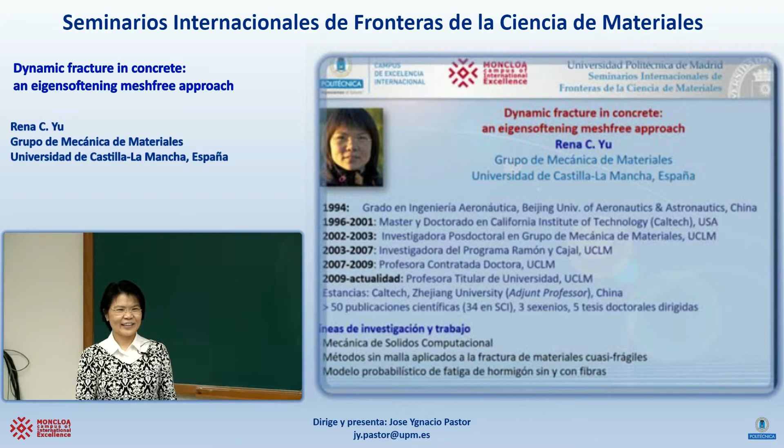Okay, so the title is Modeling the Dynamic Fracture in Concrete, an Eigensoftening Meshfree Approach. This work is in collaboration with Pedro Navas, a graduate student who just defended his thesis 10 days ago, with Professor Gonzalo Ruiz, and also Bo Li, who's from Case Western Reserve University.

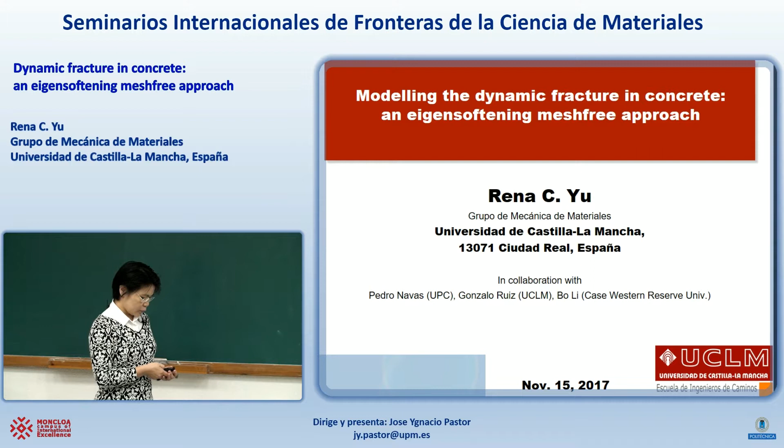Since I'm going to be talking about concrete, I want to show that concrete is a material both ancient and modern. The first picture I'm showing here is the Roman Pantheon, built in 128 AD. It is still the largest unreinforced concrete dome in the world. I guess most of you, if you have gone to Rome, might have seen this dome. And the natural light comes in from the top part.

The second one is the Los Angeles Cathedral. I was in Los Angeles for 5 years, but this was finished in 2002, 1 year after. The Cathedral of Our Lady of the Angels, actually. This was designed by a Spanish architect, Rafael Moneo, and it is made of architectural concrete. If you go to Los Angeles, go inside; it's marvelous work, very spacious, with a very modern design.

The third one I took from the webpage of the company Acciona, which is building wind towers, called Acciona Wind, I think. Now, in order to generate more electricity, the towers are required to be higher and higher. In this case, traditional steel towers have a problem of resonance because the working frequency is rather low, while concrete offers a cost-effective alternative to steel for high-rise wind towers.

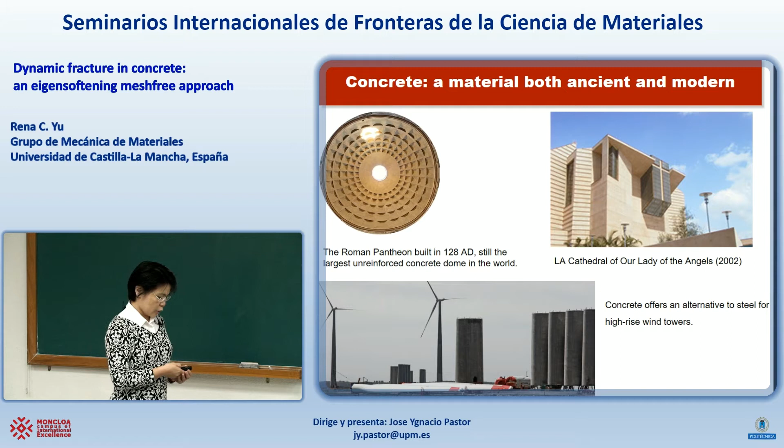Especially in this case, as engineers, we are interested to know what the dynamic behavior of concrete is. So I would like to show what we do with concrete in our group at the University of Castilla-La Mancha. This is our lab. We can do both structure and material tests, basically the mechanical characterization of concrete, like the tensile strength, compressive strength, and fracture energy.

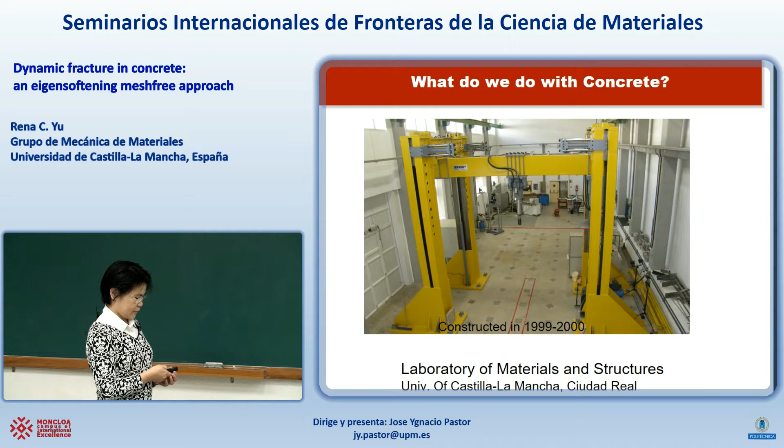And this lab was built at the end of the last century, so it is quite new. And I would emphasize that below this strong floor, we have our self-designed drop weight machine. This is the one that we use to do dynamic tests.

And this drop weight machine can drop a weight from the top, about 2.5 meters, and can drop a weight up to 120 kilograms. So I'm showing here a video of us breaking one concrete beam. That's how it works. So this is our high strength concrete being broken after the impact.

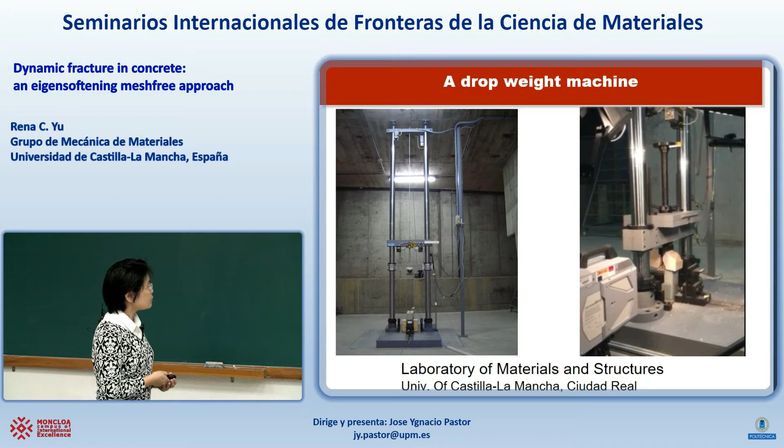So I myself in the group am in charge of the numerical part. So I'm going to show here some previous work that we used to model fracture through cohesive elements in a finite element framework. So these simulations are trying to show how the fracture propagates in a concrete beam that is being reinforced with both transversal rebars and longitudinal rebars.

This series of experimental tests was published, which is the work of Carmona, Ruiz, and Del Viso, who are both graduate students of the group. And the first row of the three pictures I'm showing is a beam that is without any notch. So these colors show to what extent the fracture has been extended. So you see how the fracture becomes localized at the central part of the beam without the notch.

While this row corresponds to a beam that has both transversal and longitudinal rebars. Again, these are numerical trials that are carried out. Without the notches, you see when we have a longitudinal rebar, there are more spread or distributed micro cracks before it finally localizes.

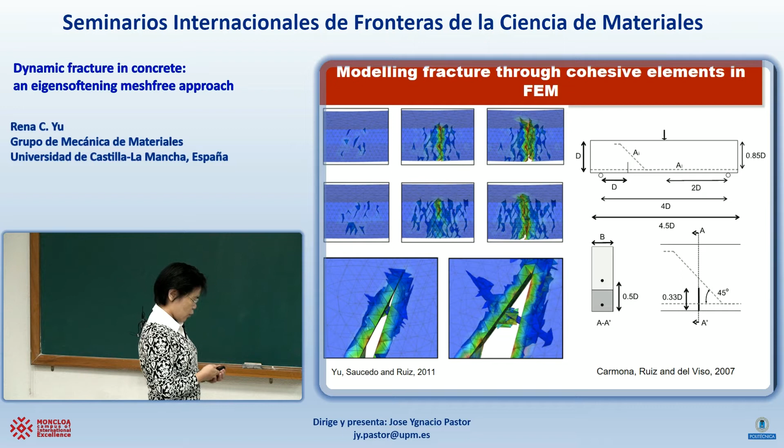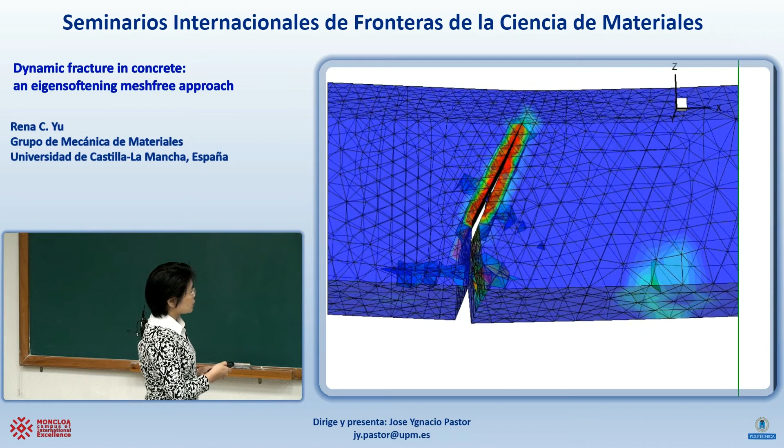So the following is a video to see how this crack propagates. You see this is the longitudinal rebar, and this is the crack that propagates along the element boundaries, and this is a transversal rebar. The red color corresponds to a crack that has become a stress-free crack.

I have to say this is a nice video, but see here, it goes along the element boundaries, but here, since the predicted crack does not exactly align with the element boundaries, it becomes zigzag. Okay? And this simulation was actually a static test, but we had to implement a quite complicated static dynamic algorithm to predict this part, which is a dynamic fracture within a static loading.

And this video, by that time, 6-7 years ago, took 2 weeks to run. I have to say I didn't use an ordinary PC. It was a quite high performance workstation to run these calculations. Of course, this is 3D.

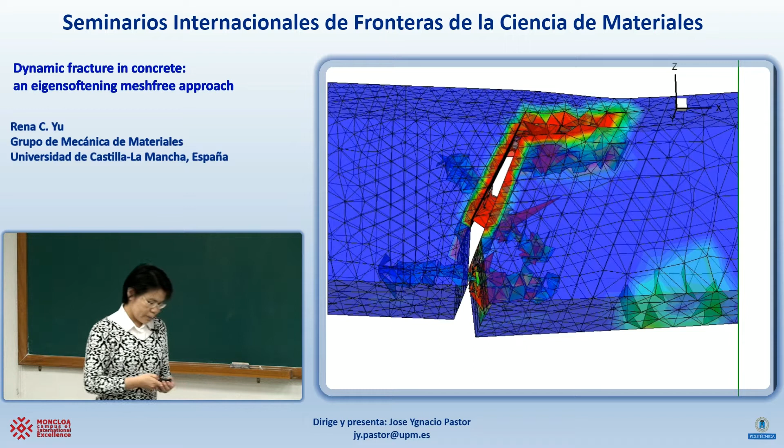And for the numerical part, since we need to do many parametric studies, this is not admissible, so we try to look for some alternatives. One of the methods was, of course, the mesh-free method, so that the crack is not aligned along the element boundaries.

So the rest of the talk follows this outline. I'm going to first speak about the mesh-free methods and the corresponding shape functions that we're going to use. Then the eigen-erosion approach to brittle fracture, and the third one is the eigen-softening approach, which we developed for quasi-brittle fracture, for materials like concrete. Then I will speak about the numerical simulations on the dynamic fracture of concrete, and later on some conclusions and future work.

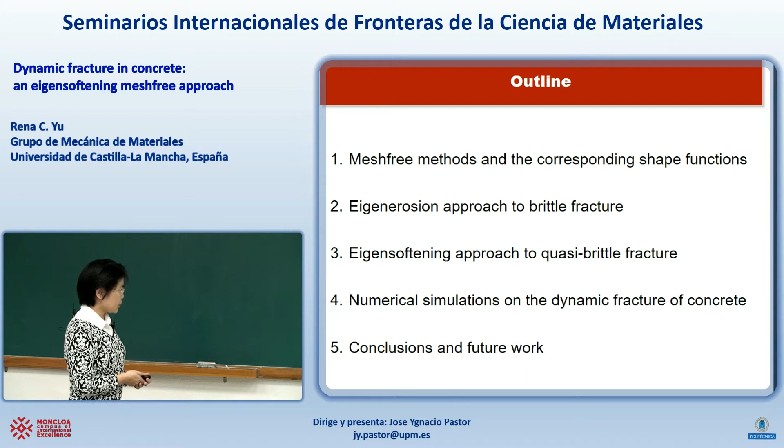So, some basics on the mesh-free methodology. Here what I show is a cut from a finite element mesh. These red solid circles are actually the integration points. For example, if this is a triangle element, of course in 2D, these blue circles are the nodal points, and these are the integration points.

So if we use a mesh-free approach, what we do is take out the elements. But we still have these integration points and the nodal points, and how they relate with each other is through a circle of influence defined by a radius. Okay?

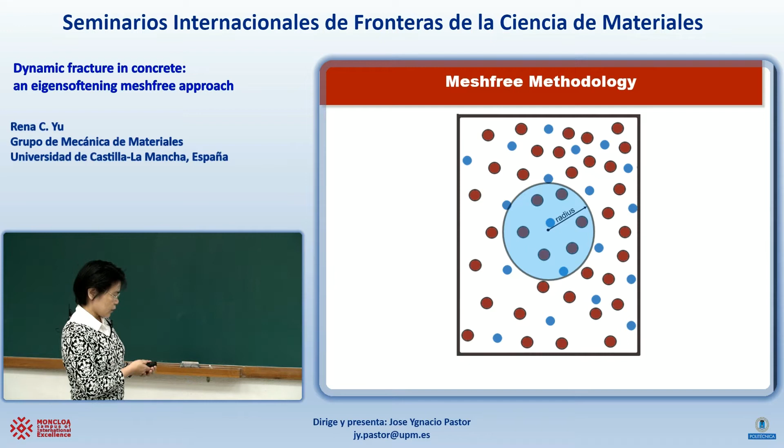In the mesh-free method that I'm going to speak about, we're going to use the same integration points also as material points. So this facilitates that we always have mass conservation. There are many other flavors of mesh-free methods, but I'm going to talk about the one that we have implemented.

So the one thing to speak about is the shape functions, because all the numerical discretization is based on the shape functions. These are the two types of shape functions. One is the polynomial type. This is a Lagrange polynomial function based on many nodal points, because if we want to reach a higher order of accuracy, we want to use more nodes of interpolation.

And the disadvantage of the polynomial type is that if we look at those two shaded squares, this part is negative. So if we want to interpolate some function, we do not like this negative part. This is not physical when we try to do some interpolations.

While on the right side, what you see is one type of exponential function. Those are the nodal points. You see this is a 3D plot. If you look at it in 2D, the nice part is that we have this bell shape. These points may approach 0, but they don't go to the negative regime.

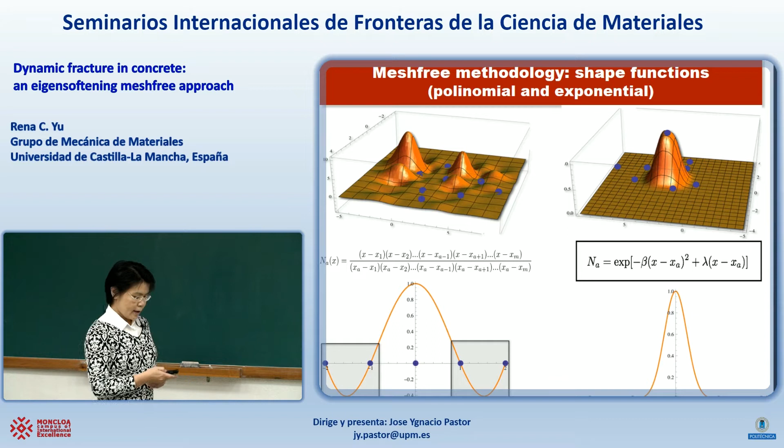And from the many types of exponential functions, I'm going to speak about one type, which is the shape functions based on the principle of maximum entropy. The principle of maximum entropy comes from information theory, which is about unbiased statistical inference based on the nodal data. According to Jaynes, this principle says the least biased probability distribution is that which maximizes entropy subject to all known constraints.

So what is the role of the probability distribution here when we talk about shape functions? Here p_A is a probability function at a node A. When we talk about a probability distribution, it is positive. This is one property that we like for the shape functions. Another is that the sum is equal to 1, which is precisely the partition of unity property of the shape functions. And the third constraint ensures the function is able to interpolate a linear function exactly.

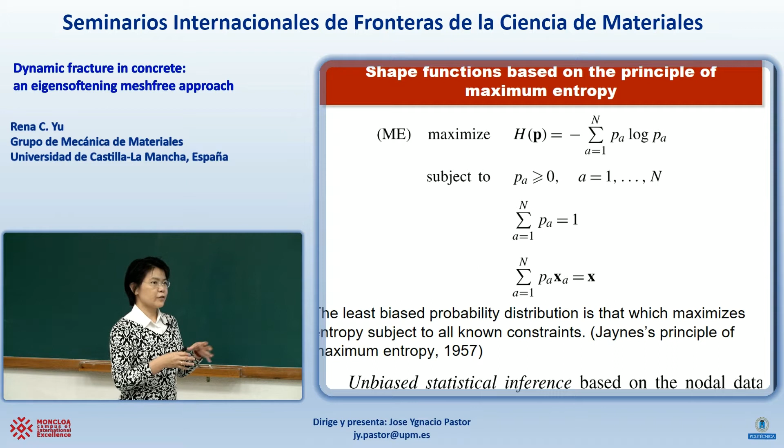So this function, the probability of node A times its logarithm, summed with the negative sign, is the entropy. If we maximize this function with respect to those three constraints, we have the least biased probability distribution. What does that mean? It means that if you want to do interpolation for a field variable, we would like to have the information of all the nodes without any bias. But on the other hand, we would also like our shape functions to have the least number of nodes possible, the least width for the shape function.

So this is the extension carried out by Arroyo and Ortiz in 2006. They modified this original entropy function with a parameter beta, with a function U of the position x and the probability p. And now we minimize this function. Remember, before it was maximized. Now we have this negative sign, and a minimization problem with respect to the same constraints. And this is the type of exponential functions that satisfy this minimization problem.

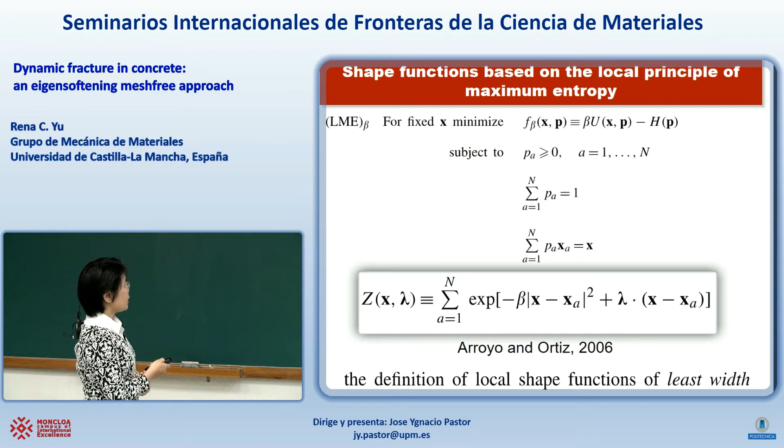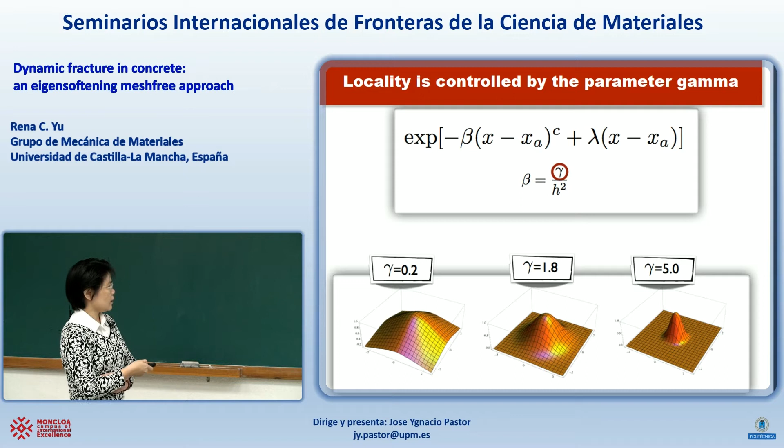And if we look specifically at this exponential function, how does it look with respect to the control parameter gamma? Before, we had the parameter beta; beta is defined as gamma divided by h squared, where h is the nodal spacing. If gamma equals 0.2, we have quite a spread function. If gamma is bigger, equal to 5, the function is quite localized, with a smaller width of the shape function. A number in between, gamma 1.8, gives a function like this. Normally in the calculation we use gamma between 1 and 2.

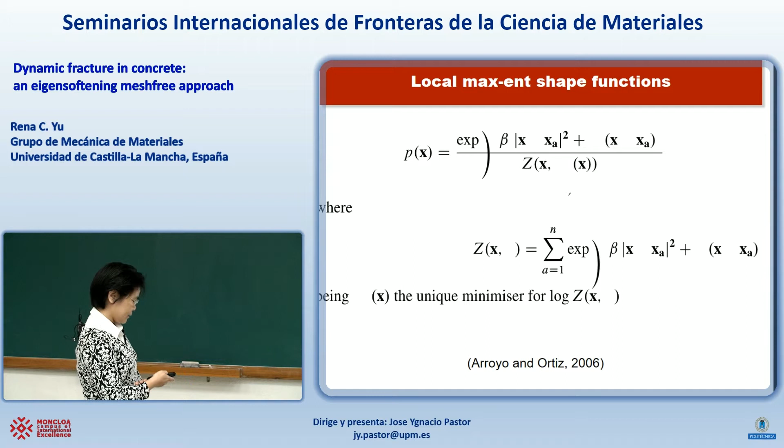...is the unique minimizer for the logarithmic function of lambda. This can be found in the work of Arroyo and Ortiz that I cited before. What I wanted to show here is that once we have the proper shape functions and the mesh-free spatial discretization for a domain like this, this is for integration time tk, this is for integration time tk plus 1, and this is a deformation mapping from tk to tk plus 1.

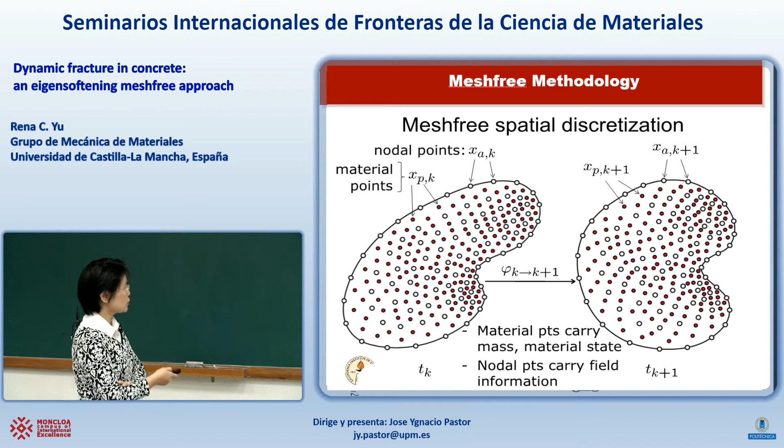The white empty circles correspond to the nodal points, which carry the field information like displacements, velocities, and accelerations, while the red solid circles are the material points, or what I previously called the integration points. They carry the state variables: not only mass but also stress, strain, and the internal variables. Okay. So once we have that, we would like to solve the problem of fracture.

So we start with the approach developed by Pandolfi and Ortiz in 2012, which is called the eigen-erosion approach to brittle fracture. The idea is that we have our 3D domain omega. This is the traction boundary condition. This is the crack set. And zooming in on the crack tip, we have the crack front represented by L, and during the time step delta t, or at time t plus delta t, the crack set has increased by this amount.

The energy functional in use is actually this. This is a strain energy function. There should be a minus sign here, and this is the traction, and this is the displacement: the external work. The idea is that this strain energy functional is added with an eigendeformation. The eigendeformation is a mode of deformation that does not cost local energy. It is defined as follows: delta here is the jump between the two crack surfaces, while n is the unit normal here. This delta c is the crack set.

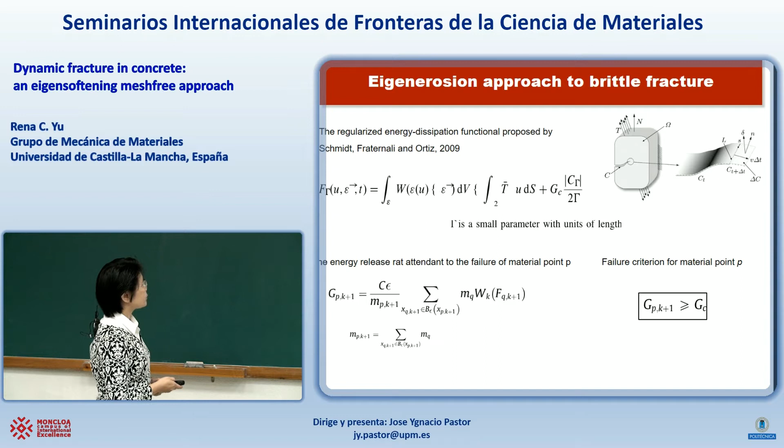The criterion for fracture is that if this energy release rate is greater than the specific fracture energy of the material, then a crack is formed. When the crack forms at a material point, the material point fails by the so-called erosion technique, so the material loses its entire stiffness. That's why the method was called eigenerosion.

This eigenerosion approach was designed for perfectly brittle materials, even though later on they used it, for example, for a metal, aluminum, to simulate the mixed tension torsion fracture experiments carried out in 1987. In the work of Pandolfi and Ortiz, they chose only the central part as the notch, did a triangulation of this part, and then took off the mesh. This is what is left with the initial material points, and these are the failed material points.

Of course, this is quite a heavy calculation, and this is the reconstructed failure surface. This is the projected profile. There are some empty areas. This is the mixed tension torsion approach.

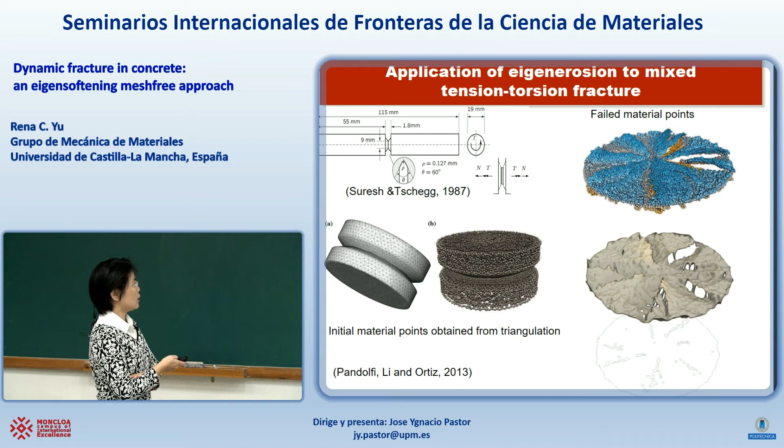Since we want to apply this approach to concrete, and we know that concrete is a quasi-brittle material, we do not expect that the eigenerosion approach would work, at least not perfectly. So we developed, with respect to the equation I have shown before, the energy release rate, we work on this equation. We try to get the incremental strain energy, because later we want to use a stress criterion instead of the energetic criterion.

So this multiplication of the terms gives us a principal stress. This is a principal stress for a material point Q, and this is an equivalent strain for this material point. And this equivalent critical stress, which is our principal stress, is defined as an average over a certain radius for all the material points Q added together, and this is the sum.

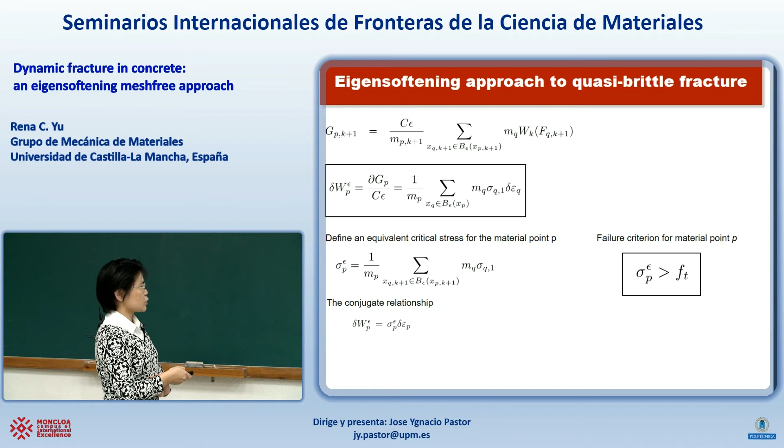Okay, this definition allows us to define the conjugate relationship so that we have a stress and a strain. This is the principal stress, and this is our equivalent strain. So since we have this stress defined, we are going to fail the material point P if it reaches or is greater than the tensile strength of the material.

So our idea was to be able to implement the cohesive fracture. What you see here is that in concrete, I'm not sure if everyone knows, when the cracks start to form, it opens gradually. So it does not go to zero right away. It gradually softens until our critical opening. Okay? This is the case for linear softening behavior, and the shaded area is the fracture energy.

So we define a damage variable, for example, corresponding to an opening Wn. This corresponds to a softened stress, which is Fn. We define a damage variable so that when we calculate the internal stress, this damage variable makes the material less stiff. So when this is equal to 0, we have our perfect material, the same as before. If it comes to this point, it will be 1, and then the material has lost all its resistance. Okay?

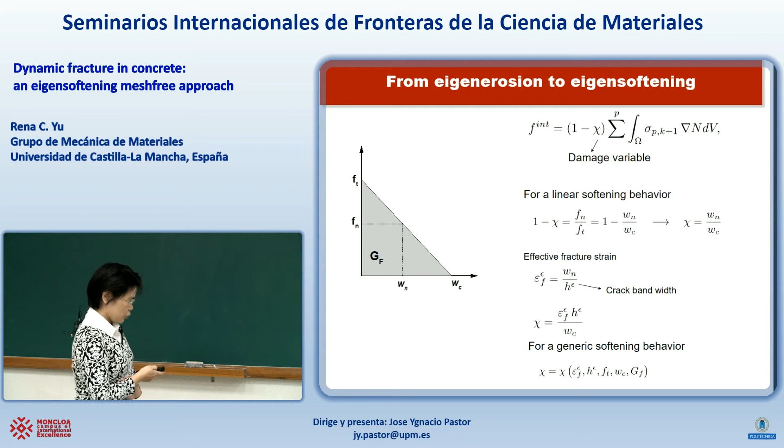Okay. So once we have established the mesh-free framework for fracture, remember we also defined the eigensoftening approach to fracture. We would like to model some dynamic fracture in high-strength concrete. Actually, this was one of the broken pieces of a beam. This is a beam where the span is 300 millimeters and the total length is 420 millimeters. It has a notch to half of its height. The height is 100, and the width is 100 millimeters.

And parallel to the center section, there were 4 strain gauges glued there to measure the strain history. Additionally, the reaction loads were measured at these 2 supports. What I show here is the loading line displacement and the reaction load measured from the 2 supports. These were the first 3 curves for the loading velocities 10 to the minus 4, 10 to the minus 1, and this is like 17.

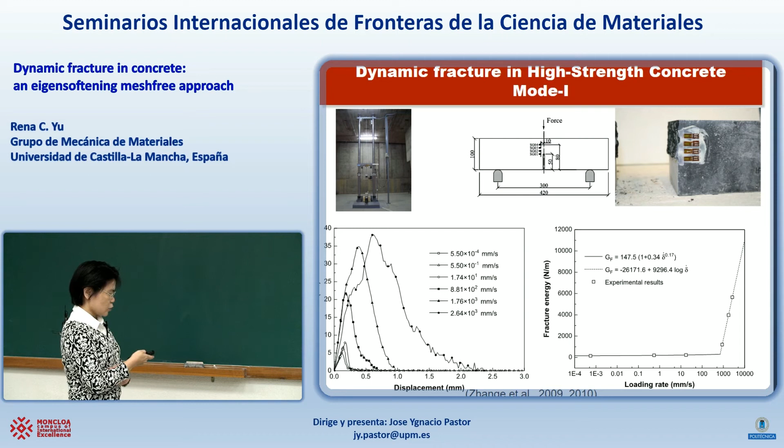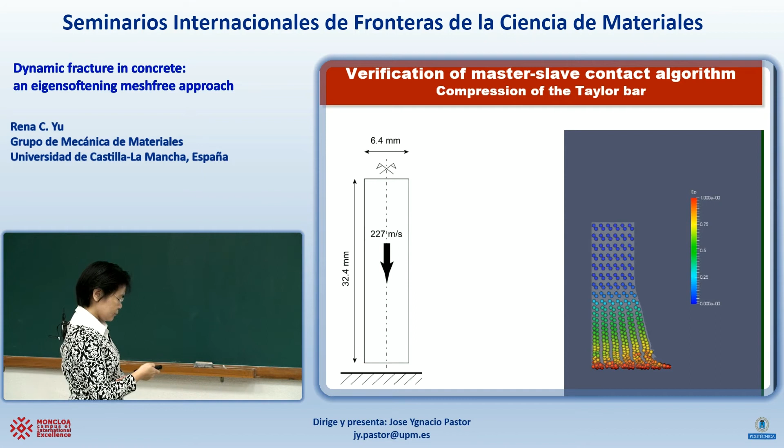And so we model the tests, using both the eigen erosion and also the eigen softening approach that we developed, and we would like to see how they compare with the experimental data. This is one of the cases because in the experimental test there were 3 velocities carried out, so we compare one of the cases.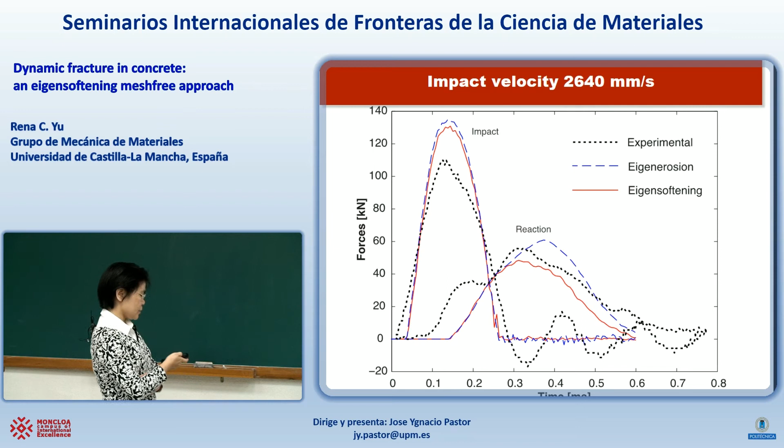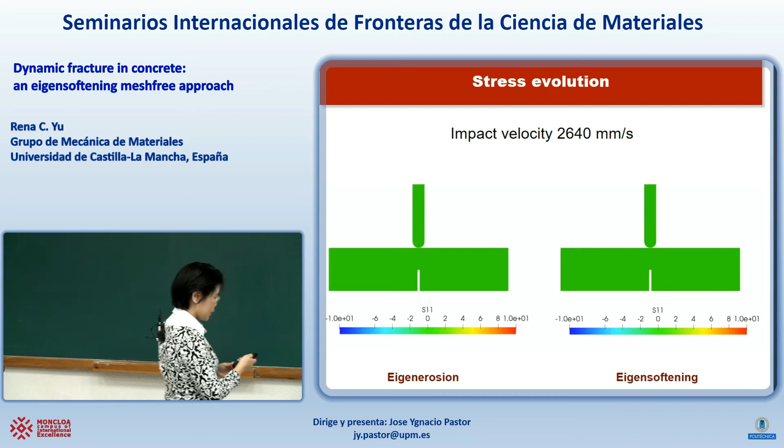And if we look at a video of how the stress evolution for the stress S11, the horizontal direction, let's see if it works. On the left side, you have the eigen erosion approach, on the right side is the eigen softening approach. What you see here is that we use a maximum of 10 megapascals, the minimum is minus 10 megapascals.

I'm going to show more that for the case if we use eigen erosion, we always have a bigger area of stress concentration. Actually, the maximum would reach around 50 to 60 megapascals. I forgot to say that the tensile strength of the material is 5 megapascals.

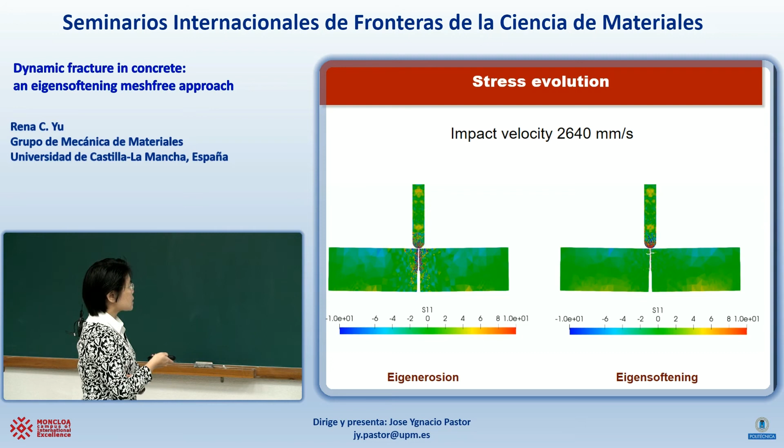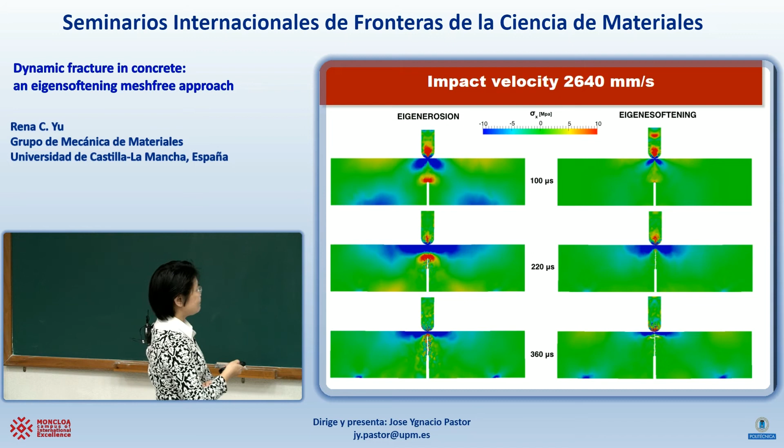The following velocity, we see something similar, but here we already see some small branches, and this is the one corresponding to the video — we have 2 branches here.

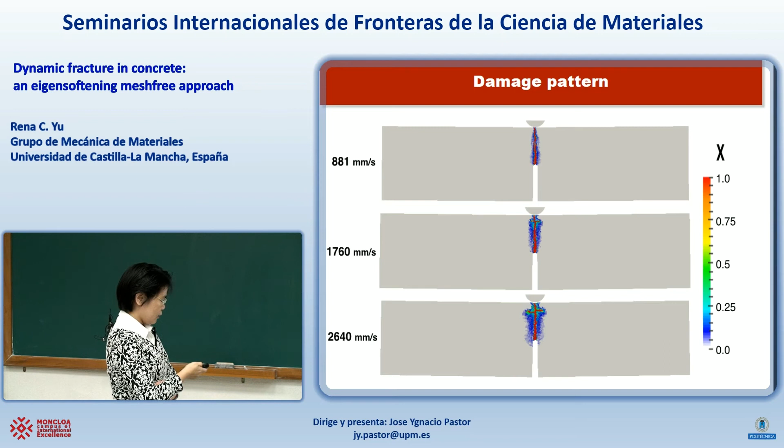And since this is a mode 1 crack, the crack pattern, we somehow know it's going to predict a straight crack. We would like to see for the 3 different velocities what the damage pattern looks like. So what you see here is that 1 means the material does not resist anything, and 0 means it's still perfect. When the velocity increases, you have a bigger area of damage, and additionally you have 2 cracks. This is something that was expected from the previous calculation — we also observed branches like this.

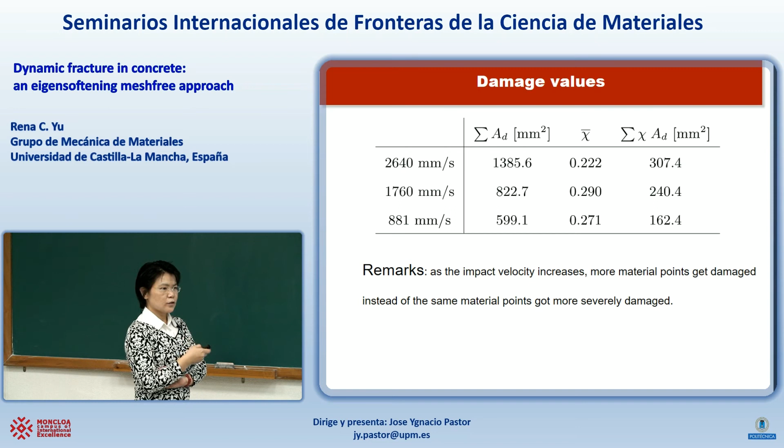And quantitatively, if we look at the area of damage for those 3 velocities, and multiply the corresponding material point's area and damage value, summing it up and dividing by the total area, this gives the average damage for each velocity. We see that those numbers are not really significantly different. As the impact velocity increases, more material gets damaged, but the same material doesn't get more severely damaged.

So if we want to look at the dynamic increase factor in strength — before we've seen that if we use eigen erosion, the stresses are being overestimated, while the eigen softening approach that we developed gives a more reasonable number, because remember, 5 megapascals is the static tensile strength. So the dynamic increase factor for those cases is between 1.1 and 2.2.

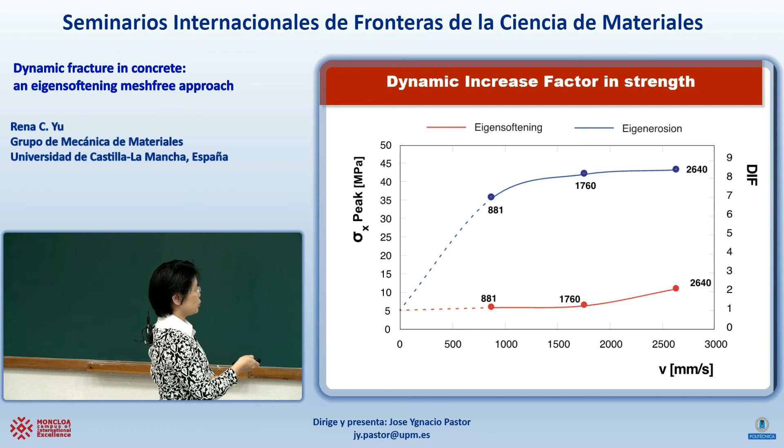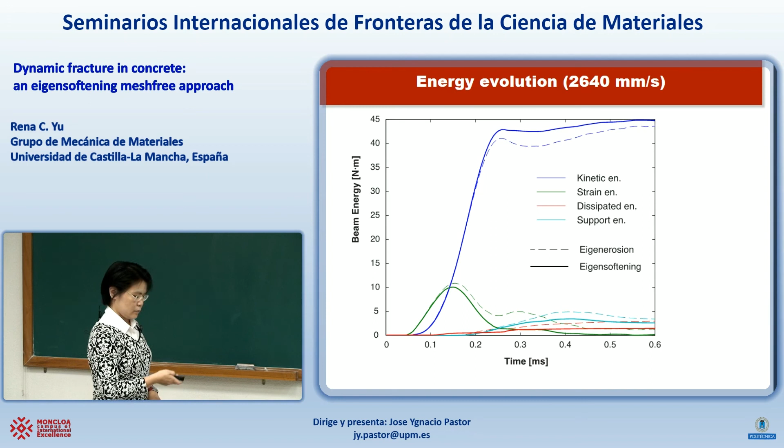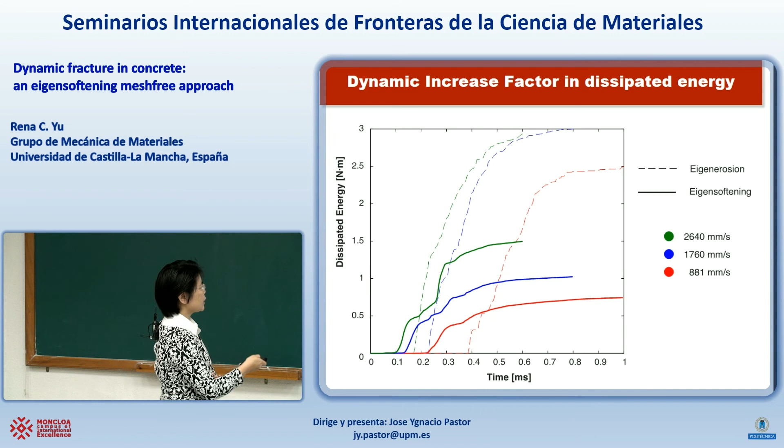In any case, what we see is that the kinetic energy is the significant part. And if we plot, these three correspond to eigen erosion, and this corresponds to eigen softening. The static value is corresponding to about 0.7 joules. So the dynamic increase factor is between 1 to 2 for these three velocities.

One thing I would like to emphasize is that we also did parametric studies for 400 millimeters per second velocity, and for this, we see that the percentage of the dissipated fracture energy as part of the total energy, when the velocity is greater, is only 3%. The significant part is the kinetic energy.

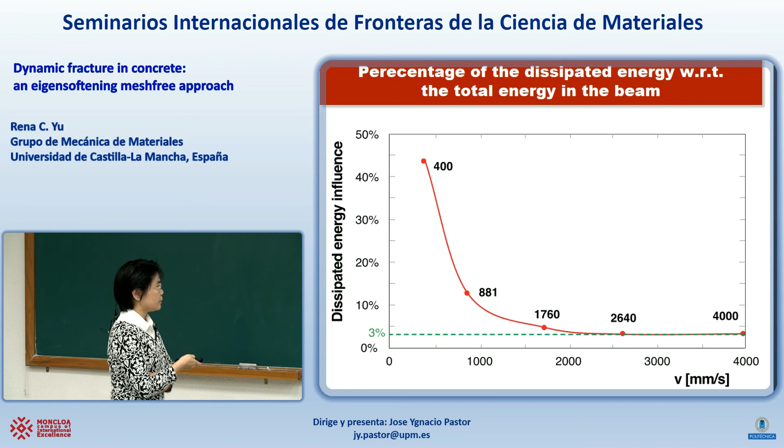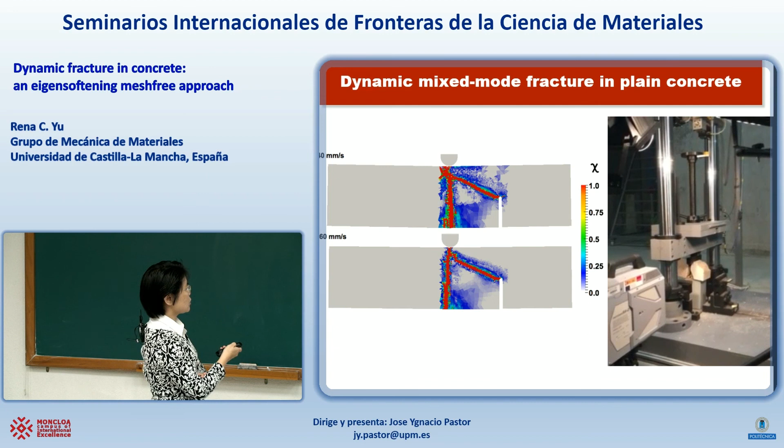Just to conclude, I also want to say that we have done some trials for dynamic fracture in mixed mode, with these two loading velocities. This is the original video that I showed before, where you see there are two pieces: the central part is broken, and also this part is broken. This is what we predicted for the two main cracks.

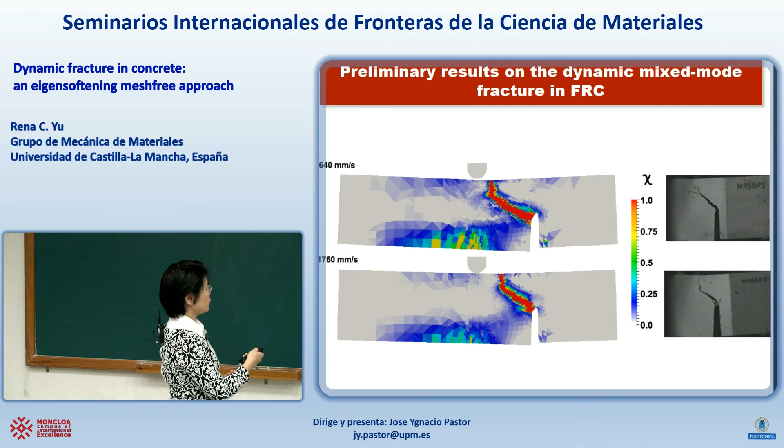Another one, if we try to add fibers - this is very preliminary work - we see that due to the existence of the fibers, we don't have the main crack at the loading section, only this crack. They change direction due to the load velocity and also the presence of fibers.

So now I come to the conclusions. We have established a mesh-free framework to model dynamic fracture of concrete. Both approaches, the eigenerosion and eigensoftening, capture the global effects like the reaction forces, and also the crack pattern. But the eigenerosion approach overestimates the stress and strain around the crack tip. From the numerical simulations on dynamic fracture in mode 1, we see that the fracture energy expenditure is only a very small amount of the total energy in the beam.

Also, as future work, we are applying this method to dynamic fracture in mixed mode, and we want to include explicit representation of fibers in the numerical code.